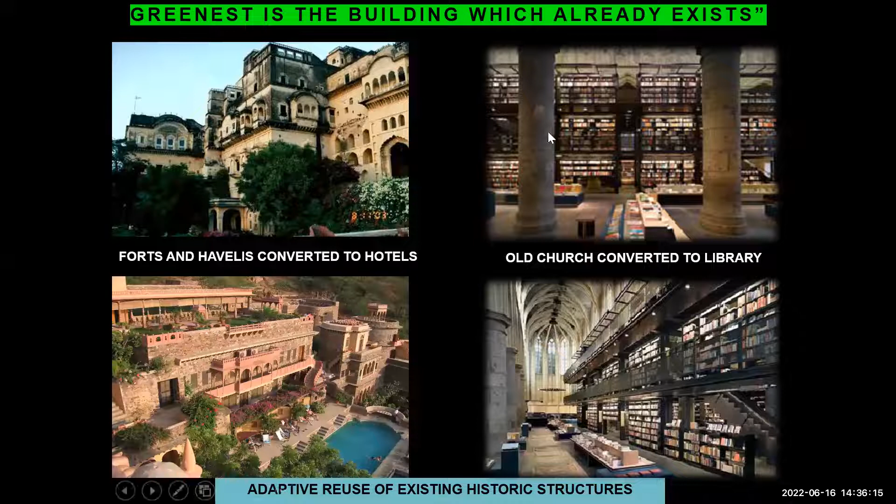We are in times where aesthetics and environment can go so beautifully hand in hand. You don't need the richness of Italian marbles or imported products to make anything look beautiful. If you look at the hierarchy of how you need to select materials, first is material reuse, then using materials with high recycled content, then materials which are recyclable, natural and plentiful, and locally available so you reduce the energy in transporting them. Next is using rapidly renewable materials like bamboo, which grow very fast, and then using very low embodied energy materials. In a house or building that you construct, the embodied energy plays a very significant role in the first year for that house.

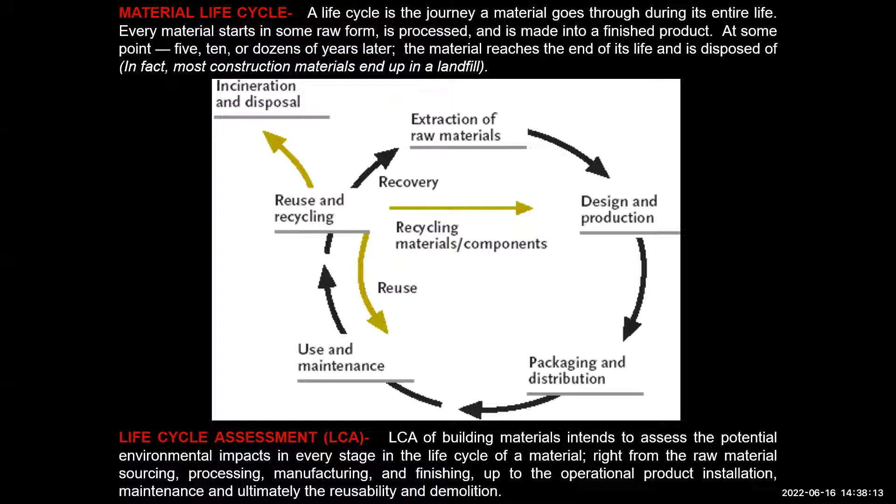When you judge a material, when you talk about embodied energy of any particular material, you need to see the complete life cycle, right from the extraction of that raw material to its design and production, to its packaging, to the use and maintenance, and then reuse and recycling. The energy that material takes in that entire life cycle has to be seen as the embodied energy of that product.

So there are certain products which are very high in their embodied energy, like metals, aluminium, stainless steel, which rate very high in embodied energy. Then there are materials which are medium energy, like lime, clay brick, tiles. And then there are low energy materials like fly ash, sand, aggregate, etc.

So let's say you want to use metal. The best way to use metal is having a high recycled metal content, because that will have less embodied energy, and metals are easily recyclable. The way you use them should also be such that you can reuse it later. So instead of welding them, if you use nut and bolt, bolted sections, which can be reused again, then over the entire life cycle of that product, the embodied energy of that material becomes much lesser. When you use cement or concrete, you can use recycled aggregate in the concrete.

When you use bricks, let's say a rat trap bond would use far lesser material and energy compared to a regular brick. A fly ash brick would have a lesser embodied energy than a regular clay-fired brick. So these things have to be evaluated when you are choosing a product for making a building.

But that's not the only thing that you look at. When you evaluate, and you have to judiciously select a material, you have to look at all of these factors.

Let's say I have a window, and in that I have a window section which I need to use. Now for the frame, I could either use aluminum, UPVC, or another material, let's say wood. But if UPVC, over its entire life cycle, is able to save me the operating energy of that building by reducing the heat which comes in, and for our climate, the cold which comes out, then it may be a better product to use over aluminium, which will let in more heat, and I will eventually be using more energy over the entire life cycle of the building.

So everything has to be evaluated. How do we install that particular material? Can I reuse it again? That also has to be considered. We have to look at the durability. What if I use a material which may have very low embodied energy, but it's not durable, and I have to keep changing it every few years? Then the whole point is lost. So as an architect, as a user, we have to look at the material in the entire paradigm, looking at the complete life cycle of that product.

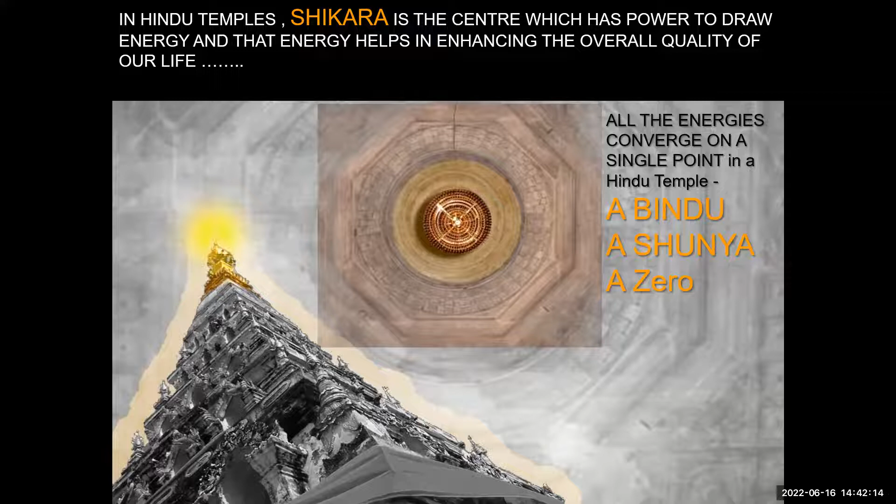The first understanding, as I mentioned, when we look at sustainability, you don't only look at energy, you look at the holistic picture. You see that the building you design will have occupants who will inhabit it. Their well-being is as important as the environment. So we have to balance all of this.

For example, if I'm designing an office, the best way to protect the environment would be that I give hardly any windows, because then the heat will not come in. I will not be burning coal to generate energy for that building, because that'll be the least amount of energy that would require.

But what about the people who are going to inhabit that building? If they don't have natural light, if they don't have connection to nature outside, if they don't have that diffuse daylight coming in, it will affect their well-being and their overall psychology.

So it's important that we give glazing, but in a way that for our particular climate, we balance the window wall ratio. We use a high performance glass, and we shade the glass according to the sun direction so that minimum heat comes in. That minimum heat we then try to remove using the most efficient and effective equipment. So you are balancing - that's the smaller scale I'm talking about.

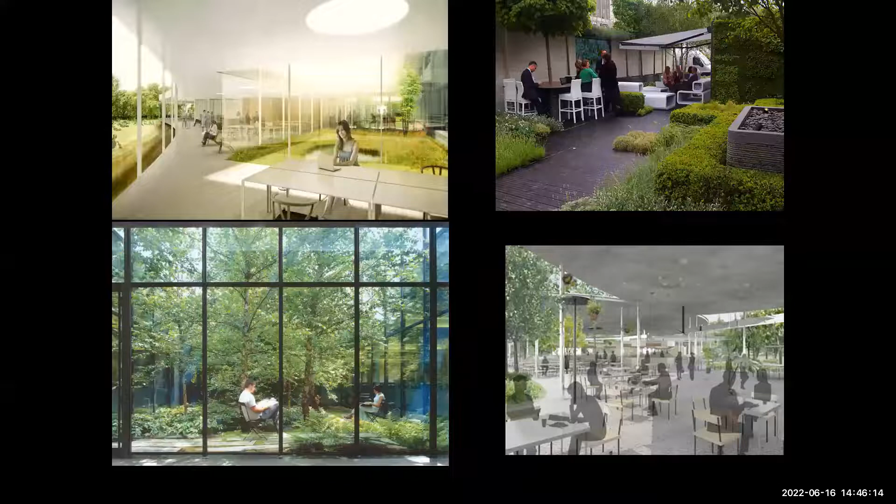And nature is timeless, it's beautiful - there's texture, pattern, colors. So connecting your buildings, having nature in touch with you for your everyday life, is very, very important.

Designing urban environments that respect and engage those natural systems by bringing ecological infrastructure aesthetically creates more beautiful social spaces. That also lowers the temperature, helps recharge water, gives you so much fresh air, and means you rely less on sources of pollution. Reducing the pollution, that's the best way.

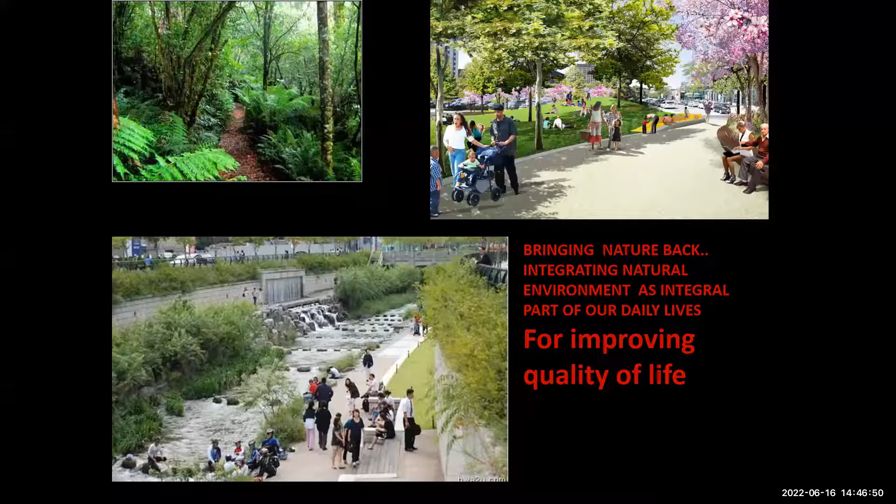This is a very interesting example. If you see in the lower picture, there was an existing nala which they've converted into a beautiful stream, and the ecology and the economics of the place has really become much better.

And interconnected spaces, social spaces - this is a project, Green Boulevard, where instead of one large tall building the developer wanted to build, we made a series of three buildings which shade each other, with the ground floor stilted. We call it a nature's walk, where people walk through these spaces before they go into their offices. There are water bodies along the wind direction which cool the space very nicely, and even in peak June, you'll find people sitting outside. It's changed the way office space is perceived, where you amalgamate your office spaces beautifully with natural areas.

The buildings are very efficiently designed - the footprint is such that it's able to capture natural light from both areas. The buildings on the south and west side have sandwich walls, which are AAC block aerated concrete blocks - much lighter, consuming less concrete, with lower embodied energy, and they also help lower the temperature inside because they provide insulation as well.

The complete glass is nicely shaded. The window wall ratio is only 30%, as against 50-60% that you see all around, which gets in too much heat and light. Now this gets only diffuse light. There's more glazing towards the north. There are these beautiful social spaces which lower the temperature.

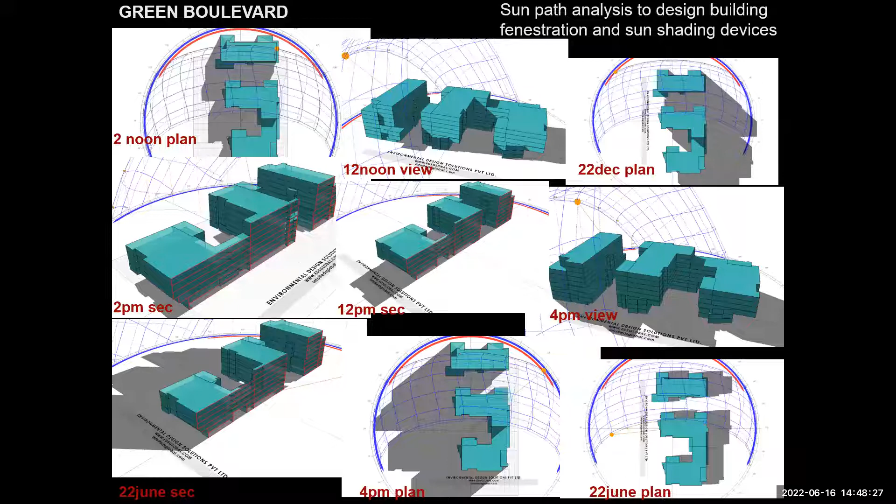These are the building simulation models, from which we could predict day one how much energy this building would actually consume. So instead of 200 square feet per ton, this actually gave us 800 square feet per ton of air conditioning. This was a very high energy performance building, and these are the various factors which contributed to lowering its overall operating energy. It operates at 1/8 of what a regular neighboring building would do.

This is another project, IGBC's first platinum building, called Patni Computers, and it saves about 36% compared to an ASHRAE base case, and almost 50% as to a standard Indian building.

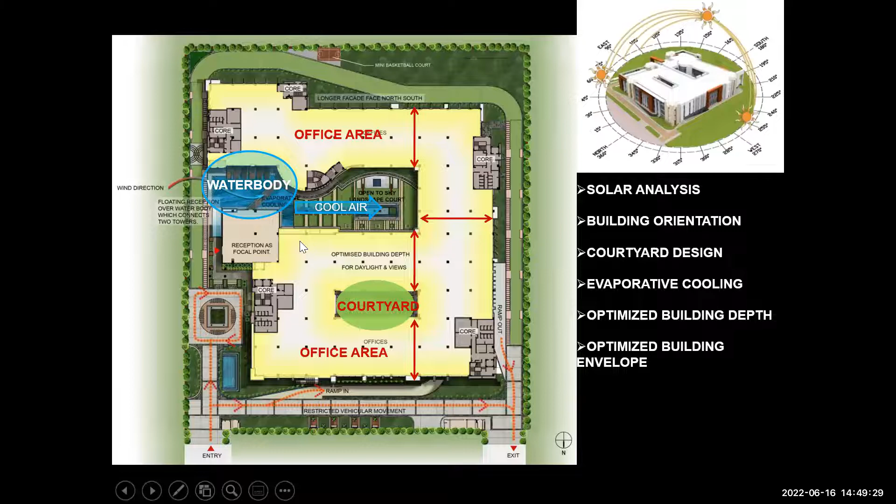It's a very nicely shaded building. There's complete diffuse light which comes in. There are 2 courtyards which actually bring in that light. There are light shelves which get the diffuse light and cut the glare coming in. Then there are water bodies and jalis which get cool air inside into the courtyard through the Venturi effect and cool this space completely - again inspired from our ancient architecture.

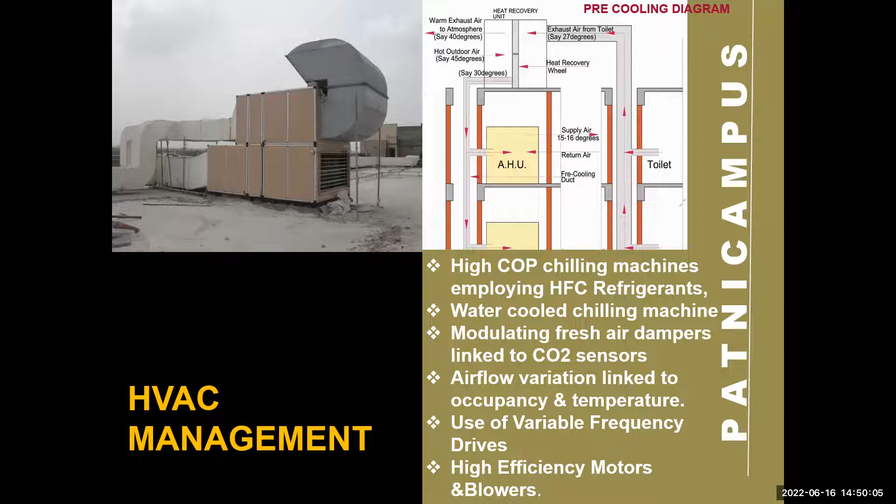These are the simulation models which lower the operating energy of this building significantly. At the same time, the materials used had very high recycled content. The walls were all aerated concrete blocks. In terms of equipment too, these were highly energy efficient - there were fresh air dampers linked to CO2 sensors. We were using pre-cooling and free cooling in fair weather seasons to lower the air conditioning cost as well.

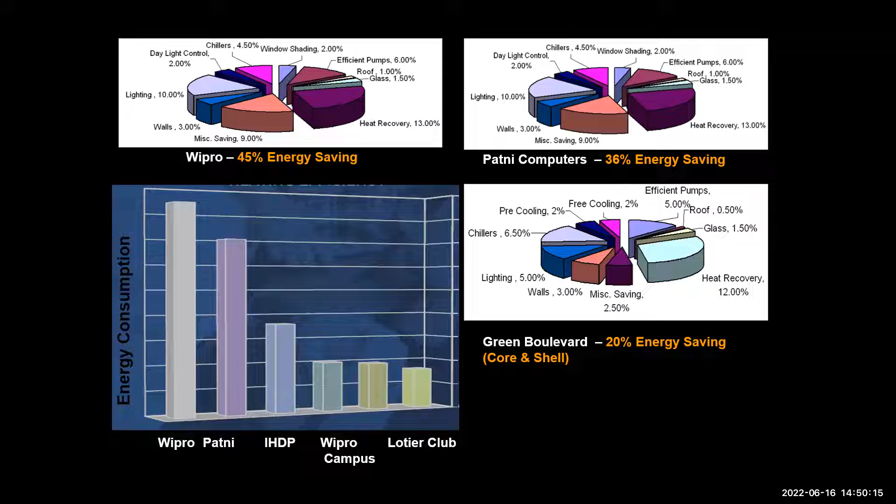So you see all these buildings were very high energy performance, but we wanted to do better. This is another project where the client wanted to break the building and build a new one, and we said no, you retain it. This was how it used to look - a lot of glass but not much natural light inside. So they had a beautiful garden, but it was not put to much use, because these were all fixed glasses. No one could actually go out and enjoy this place.

So this is an atrium which had a lot of glare. We revamped the office - we said let's not break the office at all, reuse it. We use the core and shell of the building, we only redo the interiors. We changed the facade to make it more energy efficient.

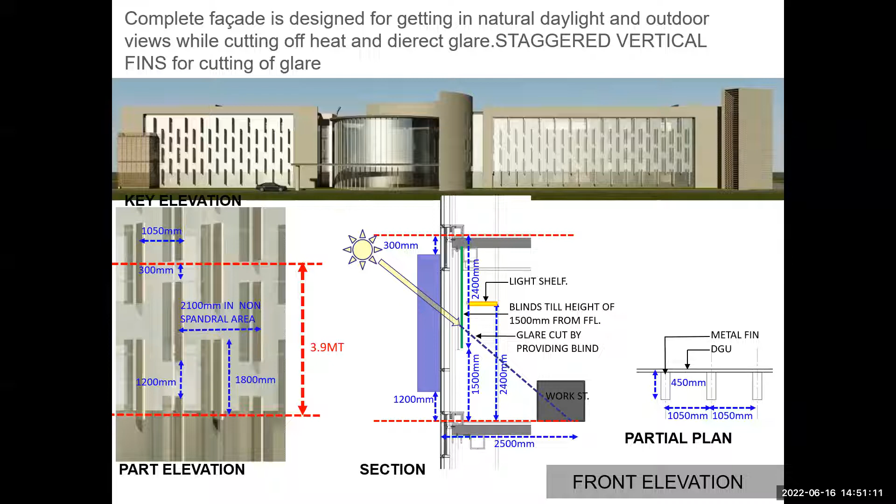So that's what we did, facade studies to ensure there was no glare coming in. That's how the facade is now, with these fins which modulate to give it interest, and at the same time shade the sun coming in. So that's how the outdoor area is now much more used, because now we have doors which open up into these spaces. We have the cafeteria, which we moved from the second floor down to the ground floor, so people could enjoy this outdoor area more, and the load on the cafeteria would be much lesser.

There are a lot of people who work out of this outside area too, because this is the north side, it's nicely shaded, and that allows people to work outside, saving more on operating energy. This is the west facade, which is nicely shaded. This is the atrium now, which has a double insulated roof glass with a shading system. We introduced plants inside so people can enjoy that - there's more fresh air within, and more oxygen inside these spaces.

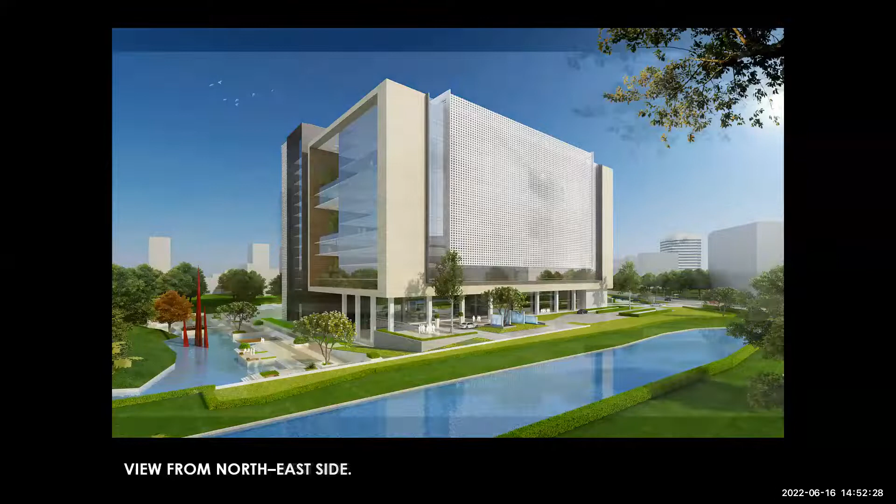Then this is another campus where we studied how shading and wind direction would help cool the place. There was an irrigation canal where we filter the water and use it for recreation purposes, so when the wind blows over it into these spaces which have these cuts, the wind direction moves from here towards the other side, and it actually cools the space. This is the jali screen which shades the interior. Overall, it really helps to effectively reduce the operating energy of the building.

So these are all high performance buildings which got platinum rating. But then we wanted to do better - we said let's attempt to go the net zero way. A net zero building will be a building which generates as much energy as it consumes over the entire year.

So this was a project, Shunya, which was way back in 2008, that we made out of waste containers. We took 4 old waste containers, designed them around a courtyard, which works very well in our Delhi climate. We made verandas out of the center two containers. The first container was mainly the entrance, kitchen, and toilet, which were non-air conditioned. The other containers were air conditioned. This is about 1,000 square feet of built area, and we had just 1 ton of air conditioning that we used.

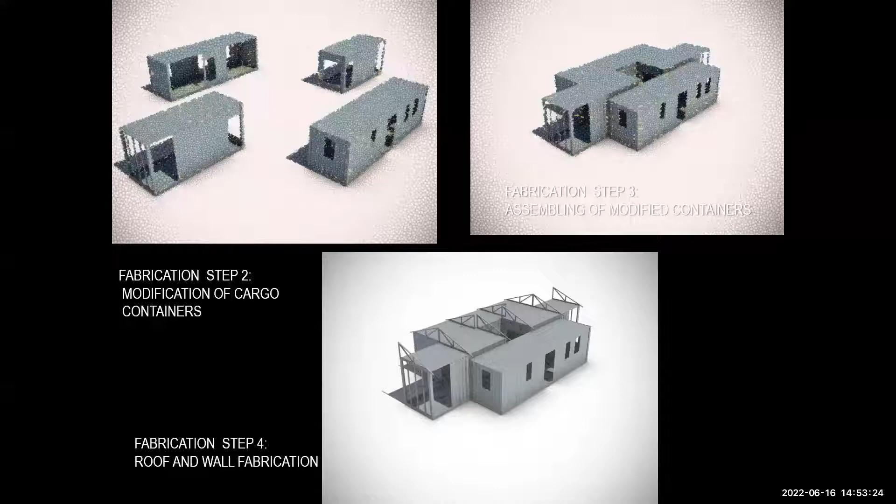I'll go through how we brought down the carbon footprint of this building. We took this building and saw what the electrical load was, which was 8,500 kilowatt hour. Cooling load was 2 tons, and carbon emissions were 7.6.

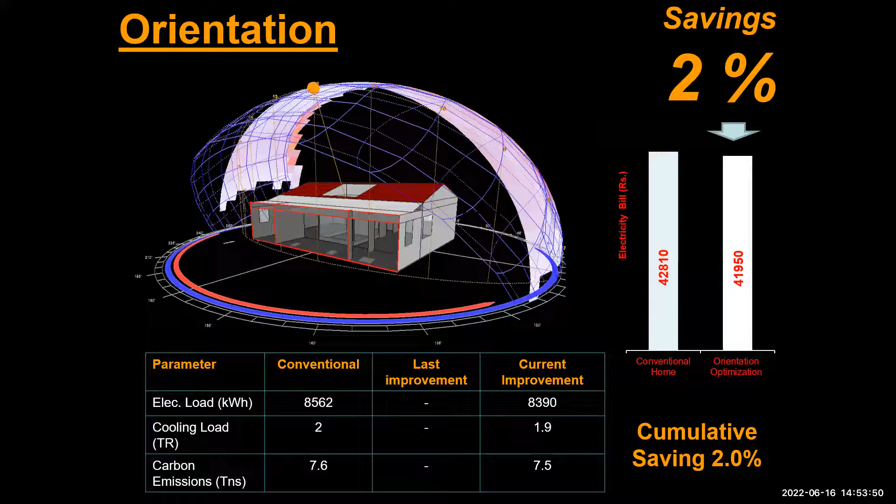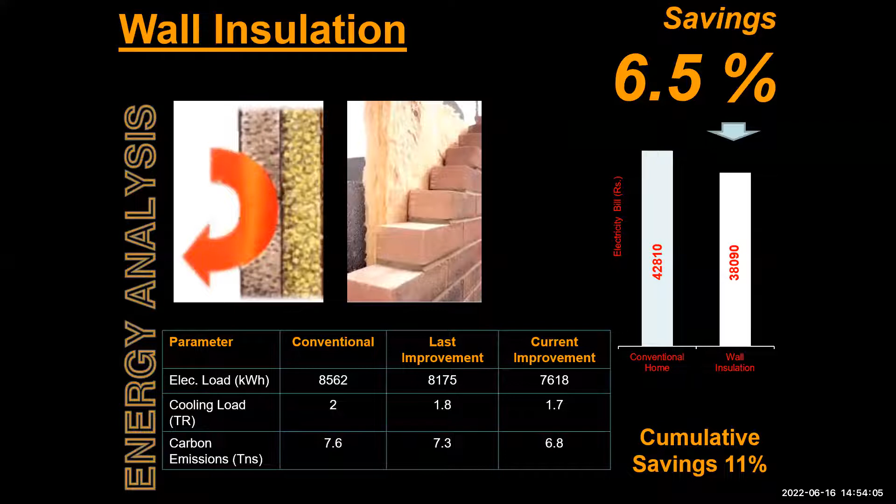We first corrected the orientation, so it was just a model first we started with. We corrected the orientation and realized we saved about 2% energy. We insulated the roof and saved another 2.5% energy. Then we insulated the walls and saved a cumulative of 11% energy, 6.5% just through the insulation of the walls. The carbon emissions also dropped down, which is the last line that you see.

We introduced double glazing, which saved another 4% energy. Then we changed the window wall ratio, reducing it, and saved another 4.5% energy.

Complete daylighting was achieved through the courtyard, with natural and diffuse light coming through it. We introduced daylight sensors, occupancy sensors, and shading devices, saving another 5.5%, cumulative of 31%. Then there was improvement in the carbon emissions, which also dropped down.

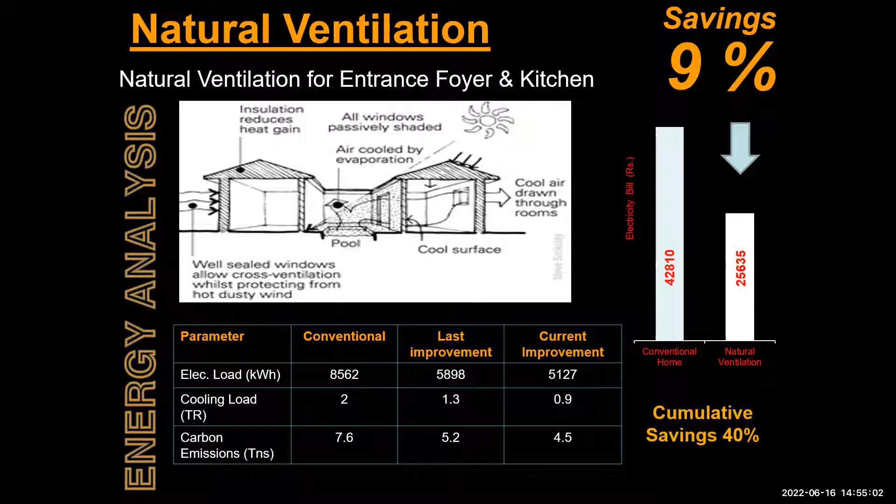Then we introduced some plantation in the courtyard and louvers in the courtyard, saving some more energy. We did natural ventilation for the entrance area, the kitchen and toilet container, which saved another 9% energy. We used solar AC, which saved another 20% energy. We used 5-star rated equipment, saving another set of energy.

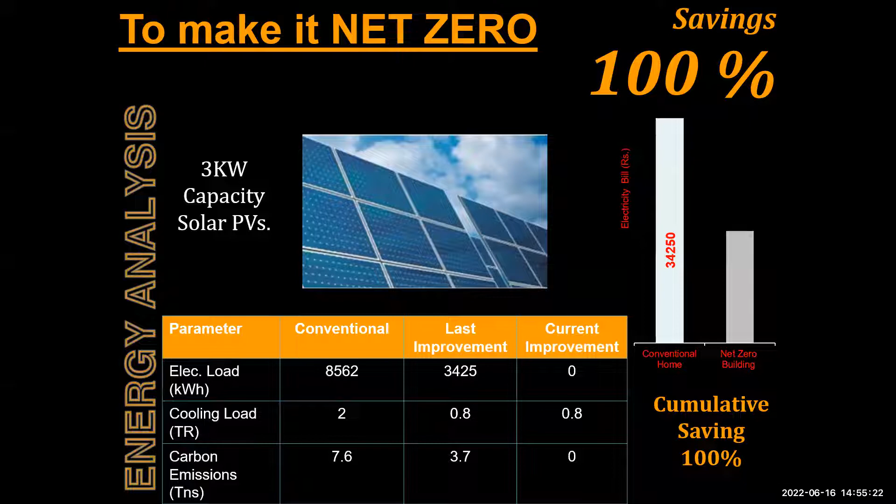Energy consumption wasn't the only focus; it was about zero water, zero waste, and zero energy. So we had a vegetable garden where you could grow your own food. We had a composting pit where all the organic waste went, and the same manure was used within the premises for these gardens. So it was again a closed loop, zero recycling concept.

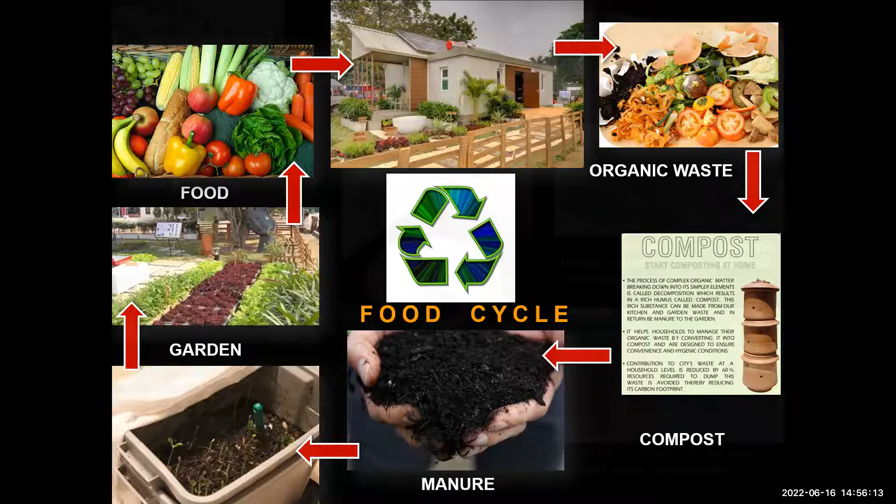Water also had a complete reuse system. We had a roof garden and vertical gardens to reduce the heat and cool the winds coming in, which also gave rise to more birds, flora, and fauna.

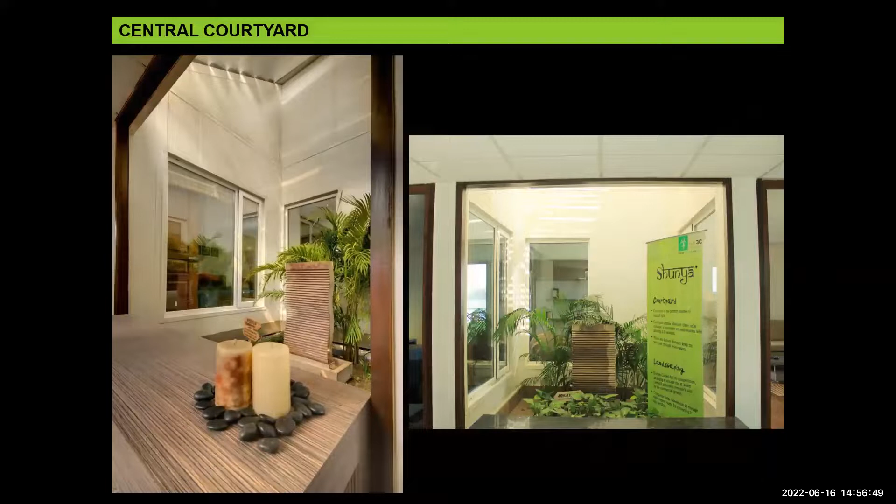So that's how the house actually looks. This was an experiment we did. Every piece of furniture you see is old furniture put to adaptive use here. And that's the courtyard, with all bamboo flooring there.

So we took this experiment and ran this house for 1 more year after it was built, and it was done very successfully.

Then we took it to another office we're doing in Calcutta, and again studied the sun and wind directions. This is an office where the complete facade generates as much energy as it would consume during the year. It's got nice marshy lands, and there's a concept of borrowed landscape where the ground floor has a cafe and outdoor spaces with solar umbrellas. These are on the south side, shading people sitting there while they get a beautiful view of the marshland, even though the site itself is very small. So that's what we call a borrowed landscape.

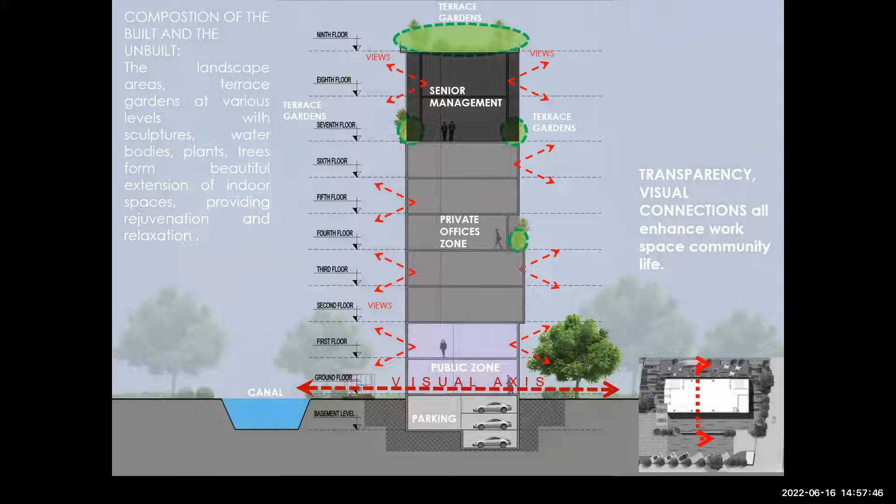We have a roof terrace garden which also has solar panels for shade. The outdoor spaces will also have these solar panels which would light up the entire thing. So these were the analyses we did. First, the intent was to bring down the energy consumption of this project to the bare minimum that we could achieve.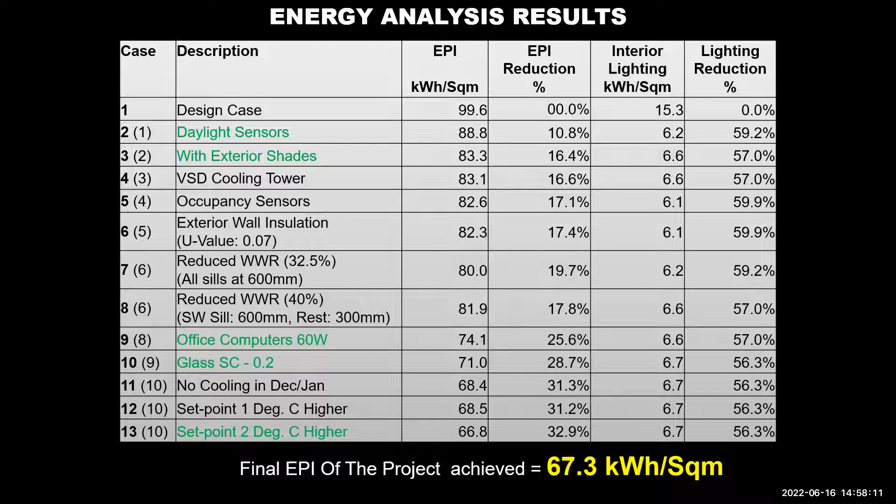So this is the final EPI of the project, which was 67.3 kilowatt hour per square meter, which is actually generated through the BIPV and rooftop solar.

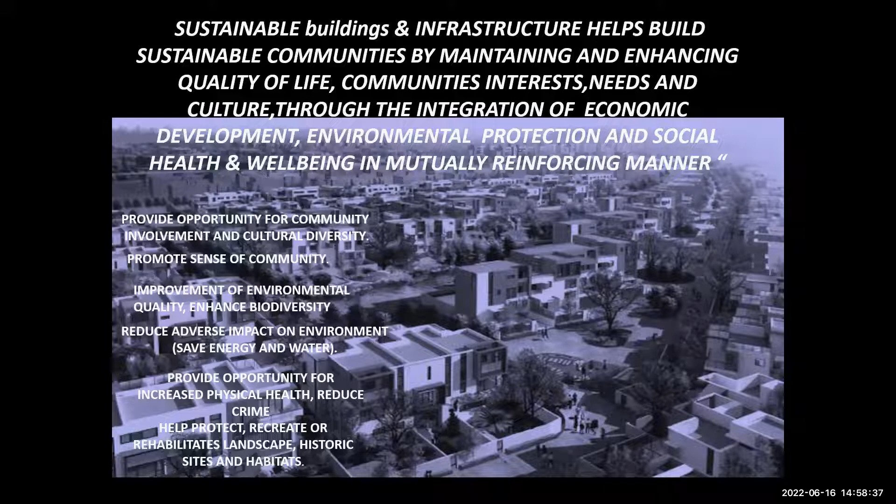In the end, I would like to say that, of course, we can only progress if we go the carbon neutral way. Our Honorable Prime Minister has declared that we are looking at 2070 as carbon neutral, and by 2030 we have to significantly, almost 50%, reduce all those emissions. So we envision India as a zero energy, zero water, zero waste society, and a minimal carbon footprint and earth-friendly society, which will lead from front.

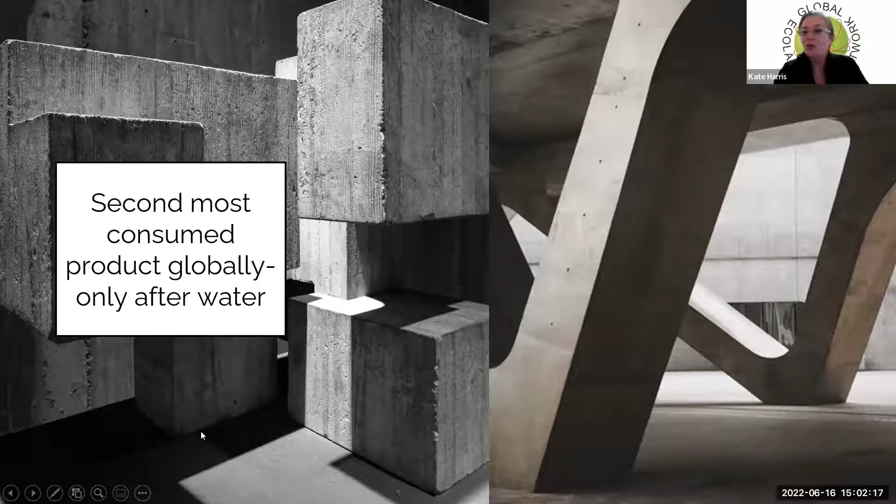Firstly, I'll talk more around the role of eco-labels and the association and driving change with low carbon products and materials. So we saw in some of those pictures, there's lots of cement and concrete, and the challenge is, how do we actually know what good looks like? We also know there's a lot of cement and concrete, and it's the second most consumed product after water, which I still find incredibly staggering.

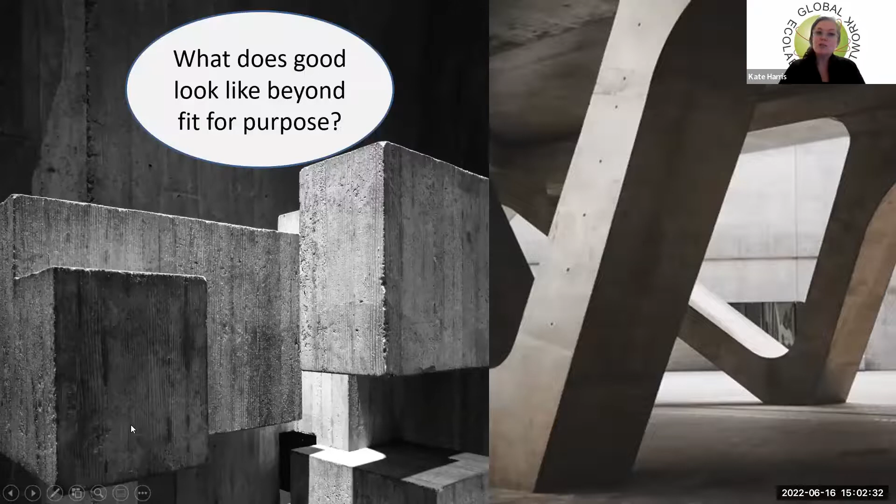So beyond fit for purpose, which all eco-labelled products require, and I'll go into that more, it certainly does require some environmental consideration as well. And Bjorn Erik, our chair, spoke very much to that, the importance of actually looking beyond the surface level to understand what good might look like.

Some of the tools that can be used to work out what good looks like are methods such as life cycle analysis, environmental product declarations, and of course we also see environmental management systems used in terms of organisational environmental efficiencies. The challenge is, how do we actually ascertain what good looks like, particularly for those who may not be environmental scientists or able to read such data as environmental product declarations? And that indeed is where the challenge and the opportunity of eco-labels come in.

So eco-labels really are a very easy, clear way of demonstrating an efficient and effective, good, environmentally preferable product. It should be very easy to see a label and know that that is a better choice for people and planet for a product or service. And that is the role of eco-labelling.

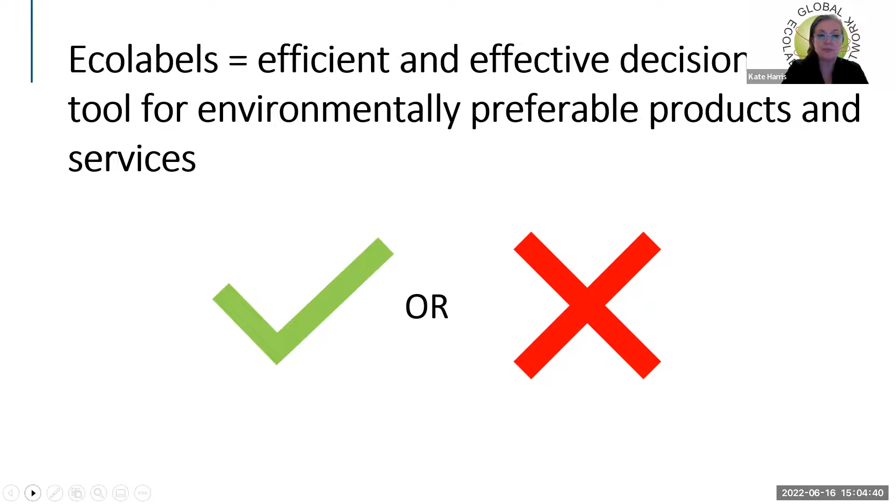There are a lot of discussions around eco-labels, and I think if you go on to things like Ecolabel Index, you'll see that there are hundreds and hundreds, but indeed many eco-labels that use that term are not purely an eco-label. And so when we talk about eco-labels, it is in the true sense of the word of ISO 14024 and the international standard definition.

So just to touch on a high level, what does that actually mean, and the credibility and rigor that sits under ISO 14024, because it is important to understand what this stands for and the credibility and transparency that goes with a true eco-label.

So it should be voluntary. It should be on that upper echelon and not minimum compliance. It is full life cycle based, and we'll talk more about that later. So it isn't just one aspect, or cradle to gate or cradle to grave. It needs to look at the full extraction of the product in the manufacturing, the usage, and of course the end of life considerations as well.

If something is eco-labeled and certified against a particular product, that should be transparent. The standards should be easily obtained, in order to understand the actual achievements and boundaries that the eco-labeled product or service has achieved. And very importantly, third-party verification.

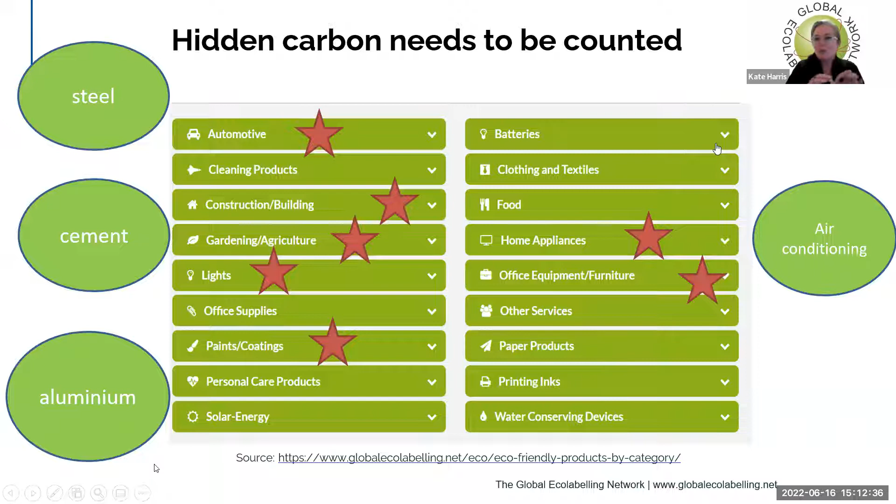So when we look at that full life cycle approach, some might be end of in the usage phase, such as home appliances and office equipment, but others are very much in manufacturing. Many would say paint doesn't have any impact on carbon, but in fact titanium dioxide, one of the ingredients in its manufacturing, has a significant impact on carbon. So again, eco-labels do restrict the amount of titanium dioxide because of the carbon impact. So I'm urging everyone to look beyond the surface of a product.

So how do eco-labels benefit providers, and why do manufacturers get involved? Procurement solutions are really looking for a market advantage. They're looking to reward leaders. How can they know what good looks like? How can they ensure that they're specified into builds and construction so that they know that they're delivering on low carbon solutions? This is really critical.

And of course, sustainable development goals. We know that at a building level this is important, but more and more organisations are also reporting on their sustainable development goals, calculating full carbon impacts and beyond. And we know that eco-labels very much at a core speak to responsible consumption, SDG Goal 12, but touch on almost every single SDG in the suite.

So when we look at things like cement and concrete and steel, they do speak to even clean water, how the water management is managed. So life below water, climate action. We heard Bjorn Erik speak of biodiversity and the importance of life on land and how that is sourced. So really there's a significant touch on many of those, and organisations can use the demonstration of use of eco-labels to also demonstrate their achievements in the Sustainable Development Goals.

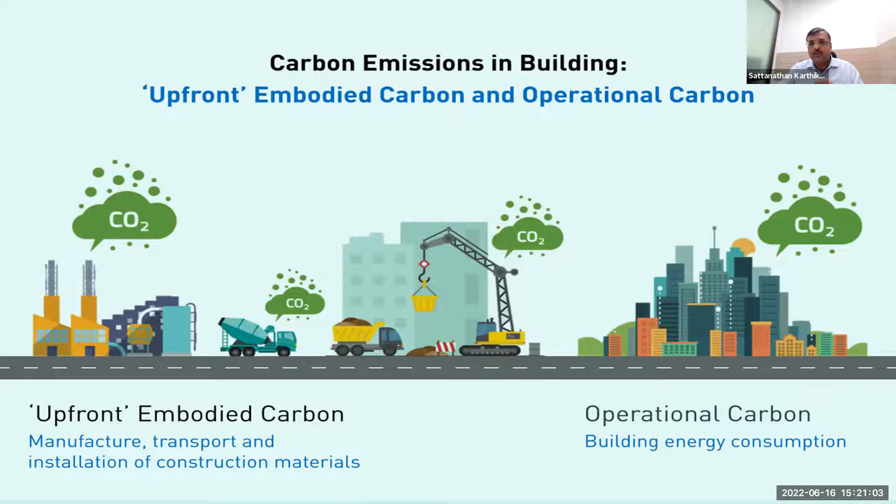But though it looks very small from the building point of view, if you look at it from the country's or nation's point of view, the supply chain of these buildings contributes significantly to the overall country's emissions — whether it is cement, concrete, or steel, they contribute significantly to the overall emission. That is the reason we give a lot more importance to addressing carbon emissions as part of the supply chain as well. So looking at this scenario, we can start working on how to go about the low carbon building.

What is this low carbon building all about? Obviously, the building should have a lower carbon footprint, whether it is embodied carbon or operational carbon — both put together, the building should have the carbon footprint as low as possible. So what are the things it has to do?

Number one, in terms of natural resource consumption, the building should have very low natural resource consumption and should make use of low carbon products and materials as much as possible for construction. The second aspect, for reducing the operational carbon footprint, it has to have the best energy efficiency so that energy consumption is very low, and on account of that, the footprint is also low. Second, it has to make use of renewable energy as much as possible so that the carbon footprint can be brought down further, and this can even allow a building to aspire to achieve a net zero carbon building.

If the building is able to offset the entire carbon emission on account of its construction as well as the operation and maintenance, that is also possible. We are working on the framework and then we will take it forward.

So the point is, as far as this presentation is concerned, I am going to focus more on the products and materials which are contributing to the embodied carbon of the building during construction. What are the things we can look at in terms of reducing the carbon footprint? But incidentally, friends, when you start using these low carbon products, it not only addresses the embodied carbon, it also addresses indirectly the operational carbon.

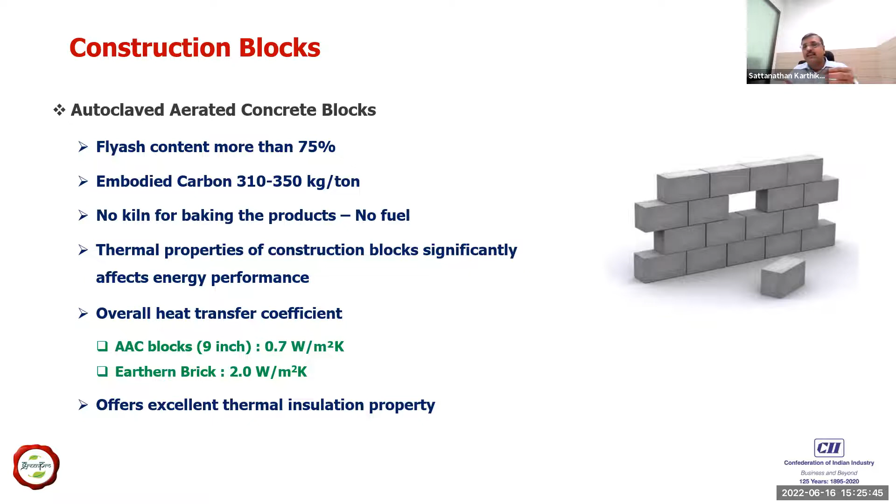There was one question from the audience, how to reduce the heat gain in the building. This is one way of doing it. If you make the envelope more thermally insulated or more efficient, obviously you will be able to bring down the heat gain into the building. So it has got an excellent thermal insulation property.

I will show you some results, how things are working. We have done the simulation of a building made with a brick wall, a red brick, and also a similar building made with the AAC block. When you do the simulation for the whole year, a building made with AAC block has an energy consumption about 4 to 5% lower compared to a building made with a red brick.

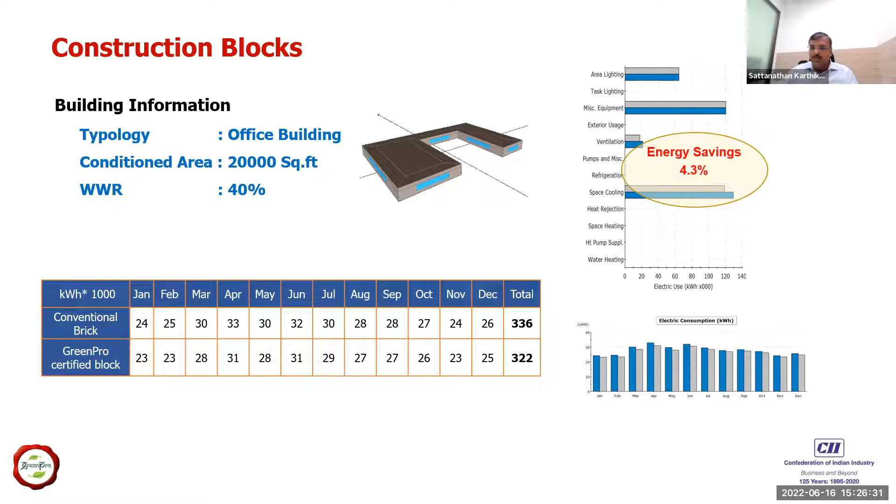The 4 to 5% may look like a very small number, friends, but this is for the lifetime of the building, you are able to bring down the energy consumption by about 4.3%. We did this only for a small building. When you go for a multi-story building, in case of a commercial building, the energy consumption reduction will be much more significant, and you will also be able to optimize the cooling load and the air conditioning capacity. Because of the reduction in cooling load, you are gaining two aspects: one, because I am going for an AAC block, I am able to reduce the embodied carbon.

Second, because I am able to reduce the cooling load, I am also able to reduce the energy consumption, and hence the reduction in the operating carbon footprint as well. So the lower emissions we are able to achieve in both the aspects.

I want to take some more examples here. Cement is a common material we use in building. Without cement, you cannot build a building. Generally people tend to go for ordinary Portland cement. There are different types of cements available, and these contribute a significant amount of carbon footprint. Cement making itself is an energy intensive process, and it leads to more carbon emissions.

There are different types of cements. One is ordinary Portland cement, which is supposed to be a very pure cement, and second is Portland Pozzolana cement, PPC, which has fly ash to the extent of about 35%. When I say fly ash to that extent, the clinker requirement comes down, and so the carbon footprint also comes down.

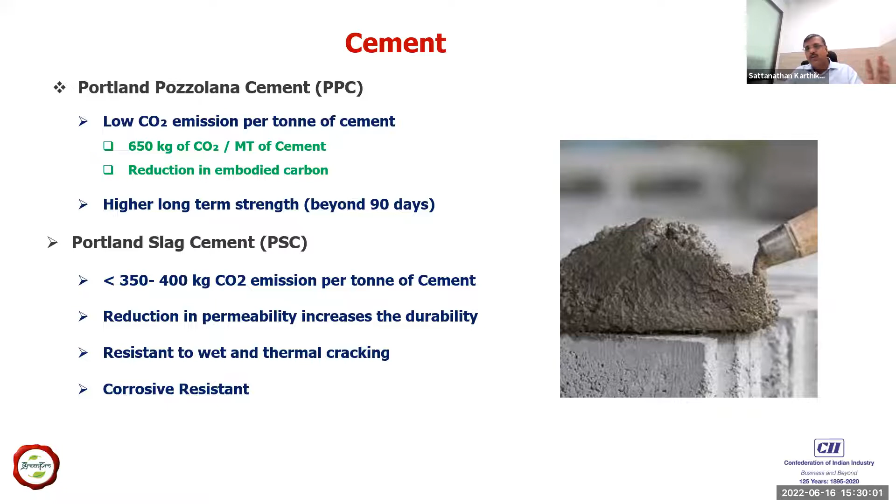If you look at the advantage compared to OPC, there is an increase in durability, and it also addresses corrosion related issues. Even in terms of thermal cracking, it is a much better cement compared to ordinary Portland cement. So apart from the reduction in carbon footprint from blended cement, there are many more benefits in terms of increased strength, durability, and corrosion resistance.

There is another cement available, composite cement, which is gaining a lot of importance nowadays, where both fly ash and GGBS are used for making the cement. The carbon footprint of this cement is even lower. The workability is much better compared to other cements, with lower heat of hydration and shrinkage, and very good corrosion resistant properties. Obviously, it reduces the embodied carbon of the whole building.

Friends, it's not only about reducing the embodied carbon. When you go for these blended cements, you will also be able to reduce the cost of construction. Compared to ordinary Portland cement, these cement products have a lower price because of increased additives. You can have a cost comparison at the market as well.

There is an exclusive presentation in the next session on ready-mix concrete. I don't want to go deeper into this, but I will highlight how the carbon footprint can be addressed as part of this. A variety of concrete mixtures are available, and you can work on addressing the carbon footprint in the concrete mixture. There is lightweight concrete, pervious concrete, high performance concrete, waterproof concrete, or self-compacting concrete - different varieties of concrete materials available. So the question is, are we using the right type of concrete for the right applications?

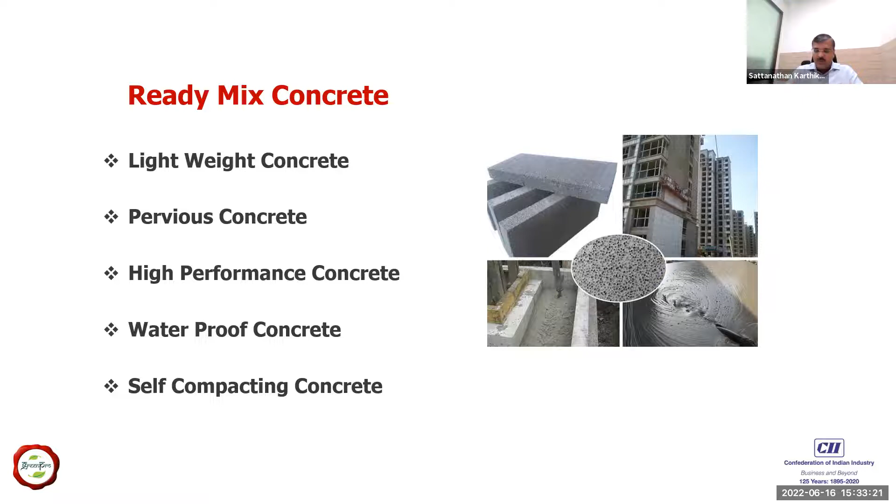Another aspect is lightweight concrete. It not only reduces the carbon footprint of the building, it also improves the thermal insulation property. This lightweight concrete has a very low density, anywhere between 800 kg per meter cube to 1200 kg per meter cube. At this density, the thermal conductivity or U value is much better compared to conventional concrete. When the thermal insulation property is better, the heat gain in the building comes down, which also reduces the air conditioning load and hence the energy consumption in the building.

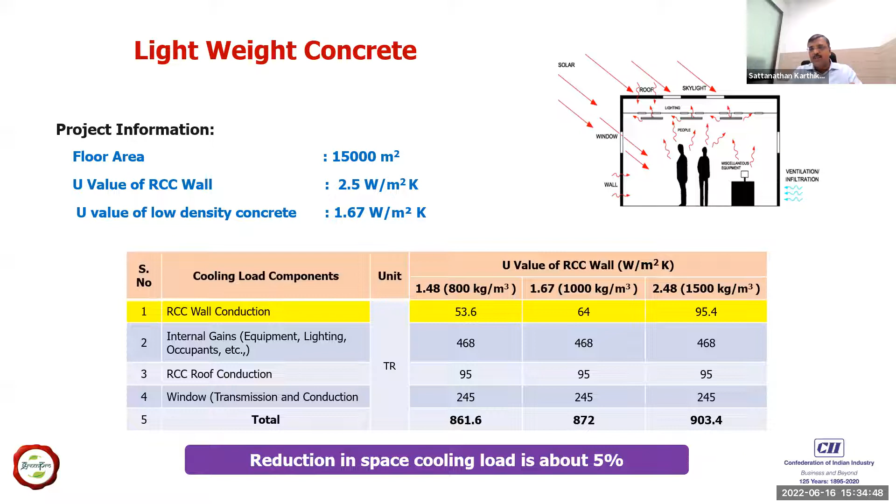This is a case study comparing a conventional RCC wall with a lightweight concrete wall. A conventional RCC wall has a U value close to about 2.5 watts per meter square Kelvin, whereas a low density concrete wall has a U value of about 1.6 watts per meter square Kelvin. If you do the calculations, you'll be able to clearly reduce the heat gain by at least 4 to 5%. Since this is part of the construction itself, this saving goes on for the lifetime of the building.

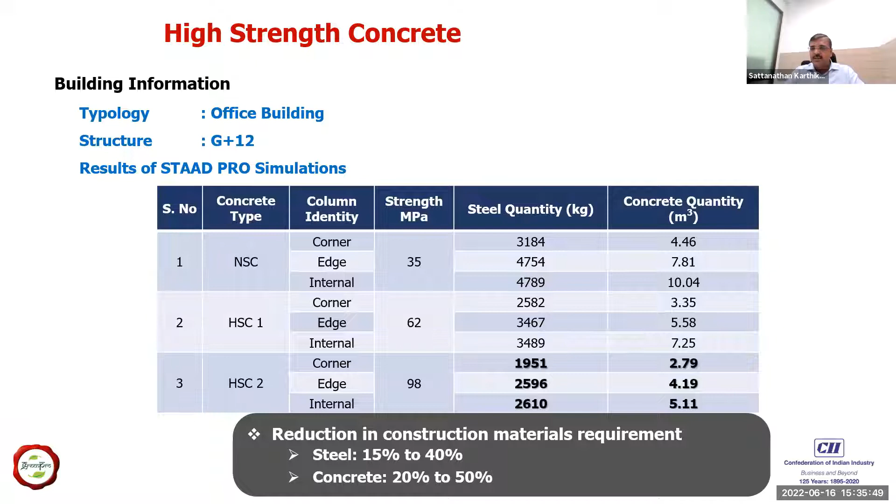Another aspect is high strength concrete materials, which you need to use depending upon the requirement. The advantage is, if you go for higher strength, you'll be able to bring down the quantity of concrete and also the steel consumption as part of the concrete. I'm not saying you can use high strength concrete everywhere - you need to use it judiciously, depending upon the requirement. If you incorporate high strength concrete by design, you have the opportunity to bring down both the steel consumption and the concrete consumption significantly.

Another major product category we need to look at is steel as part of construction. Steel is a very energy intensive industry, and the carbon footprint of steel material is also significantly high. But a lot of efforts have been taken up to bring down this carbon footprint of steel now.

There is an eco-labeling - we have GreenPro eco-labeling for steel as well. It looks at various properties of the steel. Typically we look at only the strength, but we also look at how ductility has been maintained. This is a very important parameter in steel utilization, because from the durability point of view, more than strength, ductility matters a lot. The ductility, which is tensile strength to yield strength ratio, should be more than about 1.15. We also look at corrosion resistance property, because this is one thing which reduces the life of the building.

So the corrosion resistance also has been looked at. And in this process, we are also looking at how the resource efficiency has been improved in the manufacturing process, so that a lower carbon footprint has been achieved from the steel making point of view. So these steels are identified and then eco-labeled. So friends, these are some of the materials I just thought of highlighting.

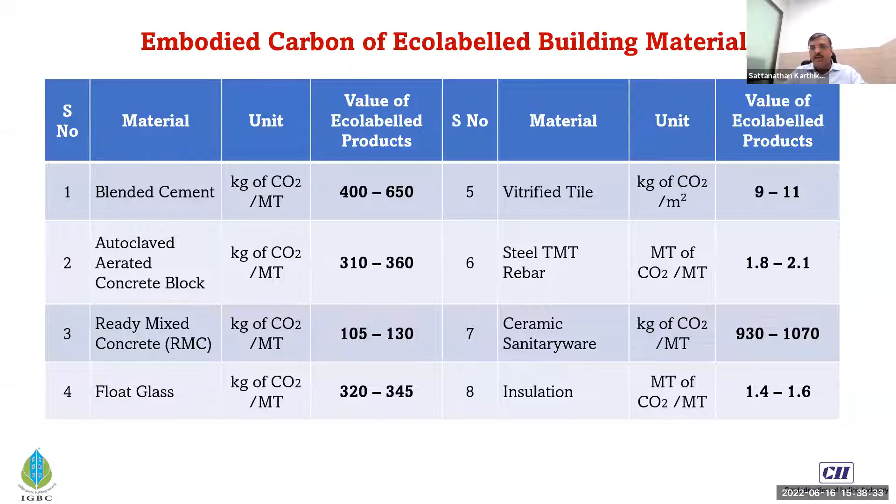Our submission to you all is please make use of the actual carbon footprint of our Indian product manufacturers. For example, if you take cement, typically they use close to about 850 to 900 kg per ton of cement, which is no longer valid. Indian cement plants are much better - the carbon emission of Indian cement is much lower, even compared to European and American cement manufacturers. So my request to you all is, look at the Indian manufacturers' carbon footprint and use it for estimating the carbon footprint of the building. These are some of the points I thought of sharing with you.

How can you identify these products? These products can be identified through the GreenPro eco-labeling. This is an initiative launched by CII. We evaluate the products based on a holistic life cycle framework, which addresses all aspects of the life cycle, and it has been internationally recognized - the Global Ecolabelling Network has recognized this GreenPro eco-label. This label helps in achieving sustainability goals as well.

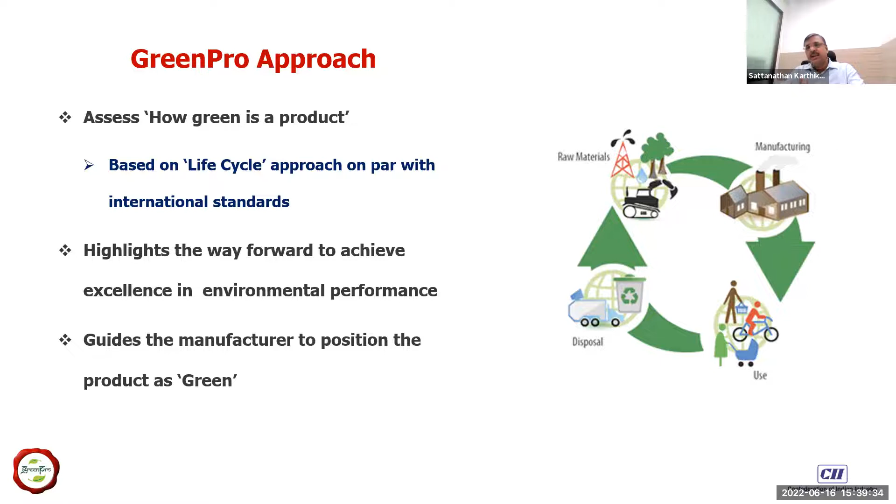So what is the approach? We assess the product holistically based on the life cycle approach. This means we not only look at product performance, we look at the raw material, the manufacturing process, the performance of the product during use, and also the end of life management. It is then evaluated and tested by a third party, and the GreenPro certification is issued for this product. So these products have a lower carbon footprint. My request to you all is to make use of GreenPro certified products for your construction.

What are the benefits from the manufacturer's point of view? There are many - it is easier to convince, there are export opportunities because this label is recognized in other countries as well, there is lower resource consumption and hence lower carbon footprint, it easily differentiates products from the competition, and there is increased market reach as well for GreenPro Ecolabel products. You may be surprised to know, especially from the manufacturer's point of view, there are about 11

As of today, we have more than 5,100 products certified by GreenPro, available in the market from more than 170 companies. In any product category from the construction industry point of view, if you look at all the leading players, all major leading players are there, and they have got their products certified.

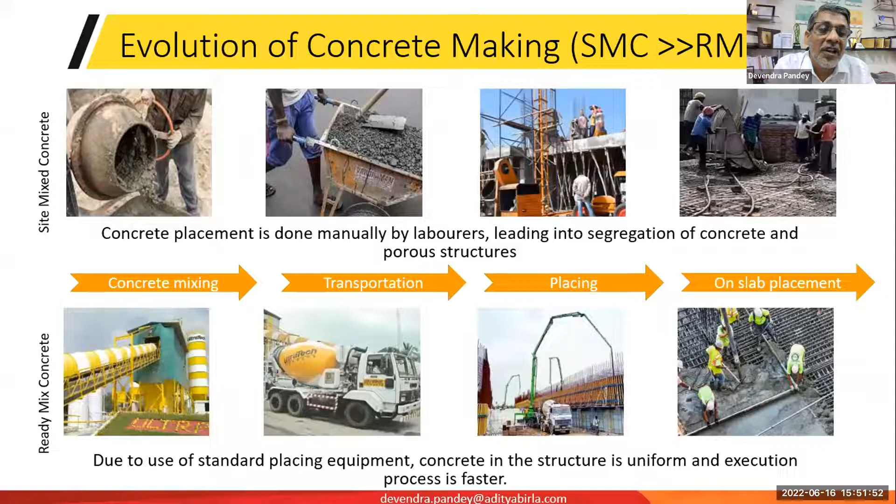But before I get to some of the emerging technologies in concrete itself, let's talk about ready-mix concrete, which in our country we have been very slow to adopt. We have been late adopters as a country as a whole. We have been making our concrete at site a lot. This slide basically represents the process of site-made concrete on top, and the same parts of the process when you use ready-mix concrete, we use better technology, better equipment, more predictable systems, cleaner environment, so all of it. So even before we start trying to adopt more modern technologies, we need to, as a country—I'm talking about industry as a whole—be conscious about making ready-mix concrete our choice rather than making concrete at site itself.

There are a lot of benefits of doing that, right from reduction in labor, improvement in quality, improvement in speed, convenient process of purchase, reduction in wastage, reduction in pollution, more sustainability, and a lot of performance-related varieties are possible. Gone are the days when we had this excuse that we don't have a ready-mix concrete plant around us. Today's spread of ready-mix concrete in the country goes up to tier 2 cities, and in some cases even much smaller cities as well.

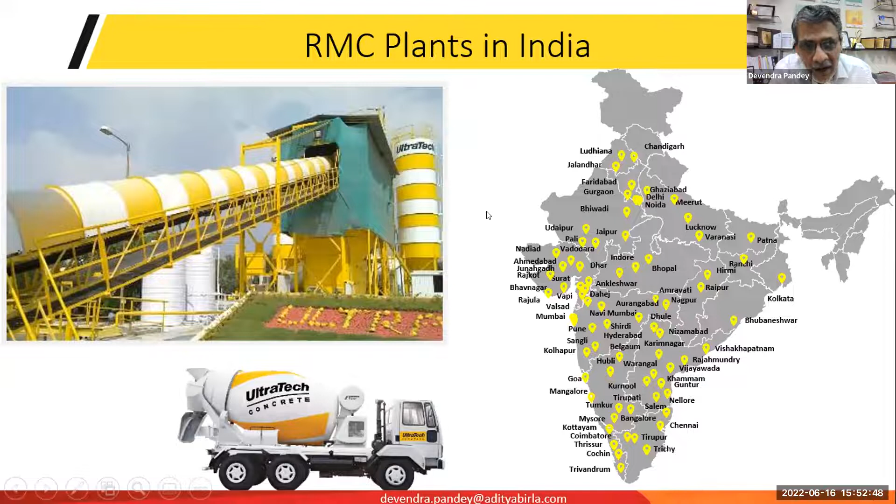So this is a broad level spread of ready-mix concrete through the country. We have sufficient availability, and it's growing, and I'm glad to say that adoption is happening fast.

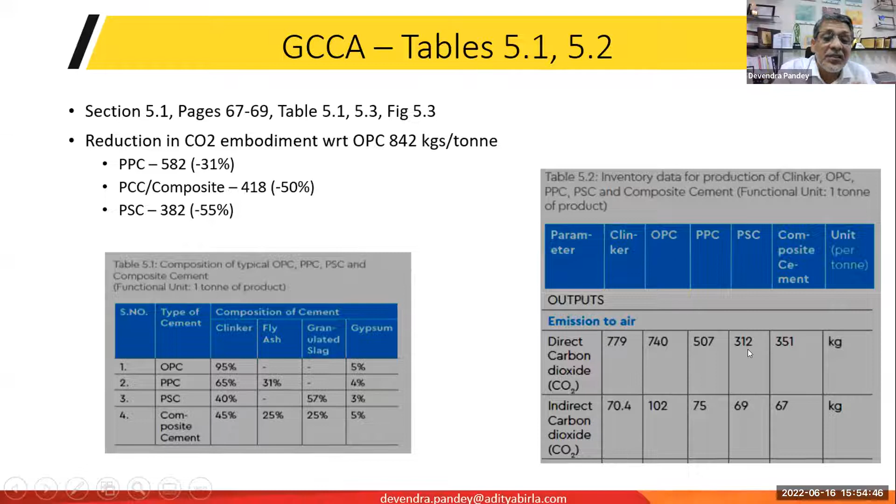This first slide was covered a little while back by Mr. Venkatagiri also. This is from the latest publication which GCCA has done, and it captures the composition of OPC, ordinary Portland cement. PPC is Portland Pozzolana cement, which has about 31% fly ash in it. Portland slag cement has about 57% GGBS in it. Composite cement has around 50% of fly ash and GGBS combined in it. Regarding the carbon footprint: OPC is at about 740 kgs per metric ton, while PPC is at 507, slag cement is at 312, and composite cement is at 351. This is when you directly use the cement, making the choice of cement.

But when you are designing a concrete mix, you have a little bit more liberty—or your ready-mix supplier has a lot more liberty—in tweaking the mix and targeting a certain percentage reduction in the carbon footprint of the concrete itself. So I'm just showing you here 3 categories of concrete products which have 30%, 40%, and 50% reduction in CO2.

How is this done? So here we go. I'm showing to you here 4 mixes.

Mix one is basically if we made an M30 grade concrete using just OPC. It would consume about 410 kgs of OPC, and the CO2 footprint per cubic meter of concrete, only for material production. We can, of course, extend this analysis right from production up to construction and even in the life cycle, but at the moment I'm covering the material. So concrete itself is 413 kg per meter cube of concrete.

While in mix 2, what you see is an incorporation of fly ash within the allowable limits of the Indian standards. So the embodied CO2 reduces to 282, which is a 32% reduction.

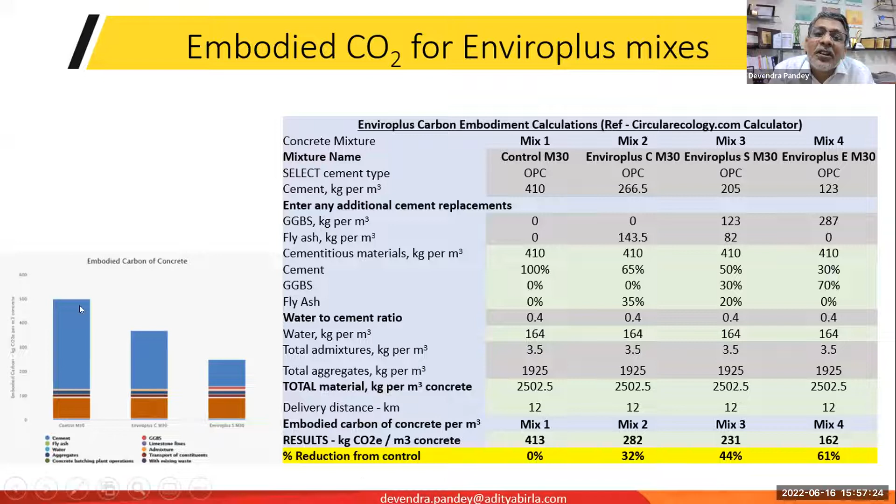So the point is that the information available to us today allows us to certify a concrete mix based on its carbon footprint. And the specifiers, I think the time is coming when specifiers can start specifying, not just based on grade of concrete, but also based on CO2 footprint. And I think concrete suppliers would be able to support this kind of specification.

Now there are mandates across most of the municipal corporations that this waste needs to be recycled in plants. Government is supporting that initiative, and in a lot of locations you now have these plants which are recycling this material in a very proper, scientifically designed setup.

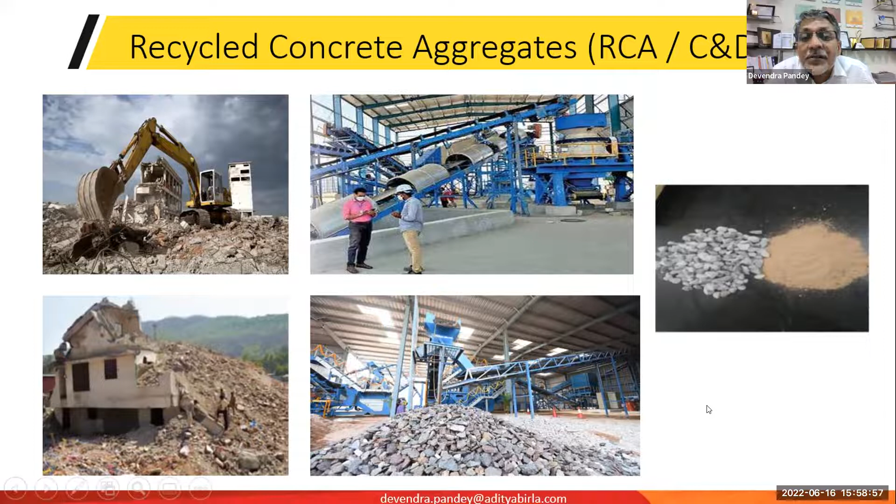Now, another approach towards improving the sustainability or reducing the footprint is basically making our materials last longer. So building durable structures is an important approach.

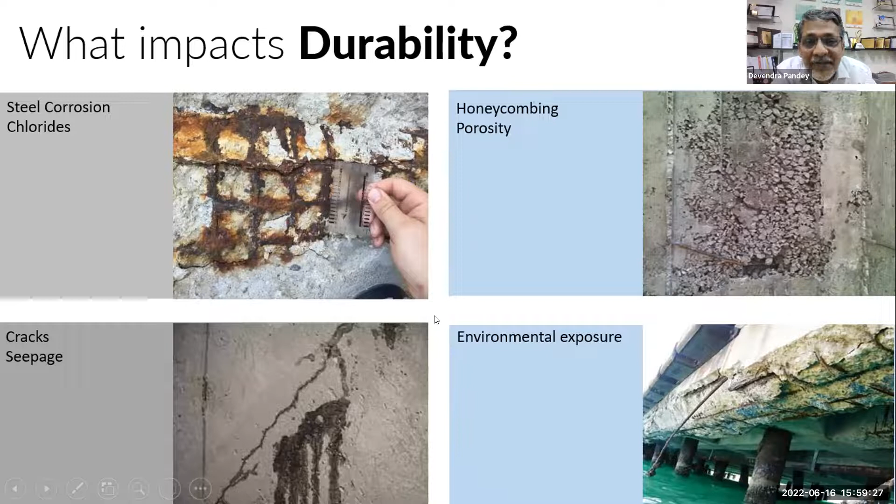Without getting into too much of the technicalities of this subject, the various kinds of problems which lead to the lower life of concrete structures can be carefully approached, and there are solutions available right from usage of supplementary cementitious materials to uses of fiber, to improving the crack resistance of concrete, and also improving the workability of concrete to facilitate a better compacted structure. All of this put together can lead to structures which can have a very predictable high life, to maybe the extent of 100% increase in the life of the structure, and hence, on a life cycle basis, lesser consumption of material.

Now, another variety of concrete, what you see popularly known as self-compacting concrete. As the name suggests, it does not require the compaction effort required at site, and hence it reduces labor, it improves the speed, but compaction itself is a energy-driven process.

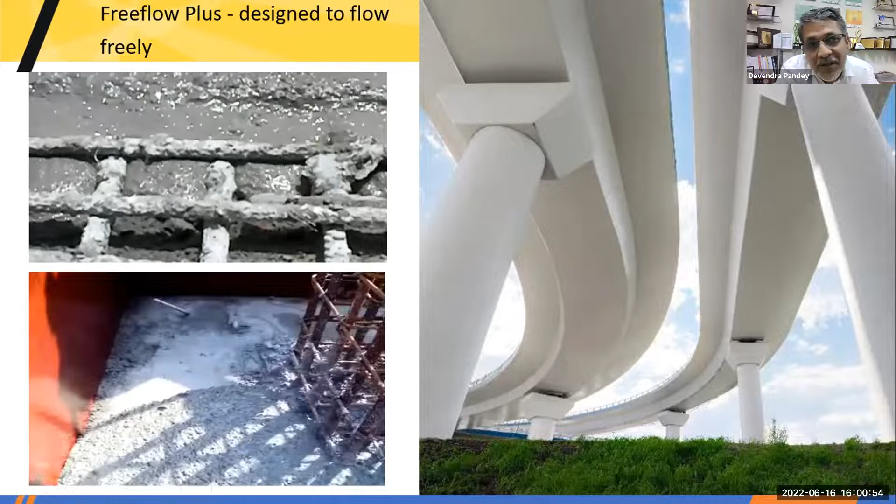It may be a small component, but it also causes noise pollution at sites, and all of this can be sorted by this variety of concrete, which does not require any manual compaction at all. Of course, there are other benefits, like you can have absolutely gorgeous finishes on the surface of concrete. You can imprint, emboss, you can have exposed structures, etc.

Another interesting variety of concrete is lightweight concrete, and it's basically a very good filler material. Sand is no more available in sufficient quantities. Spreading sand as a filler, even under tile bedding etc. in the construction site, causes a lot of dust, pollution, etc.

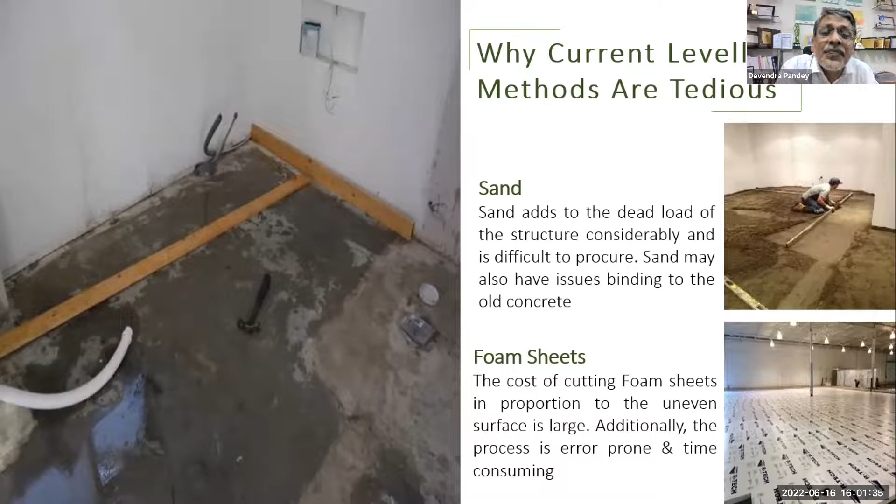A better alternative to that is lightweight concrete, which apart from being smart and very easy to use, also has a tremendous benefit of thermal insulation. So it has a very high thermal insulation value. Using it in roofs, etc., can give us very energy efficient buildings.

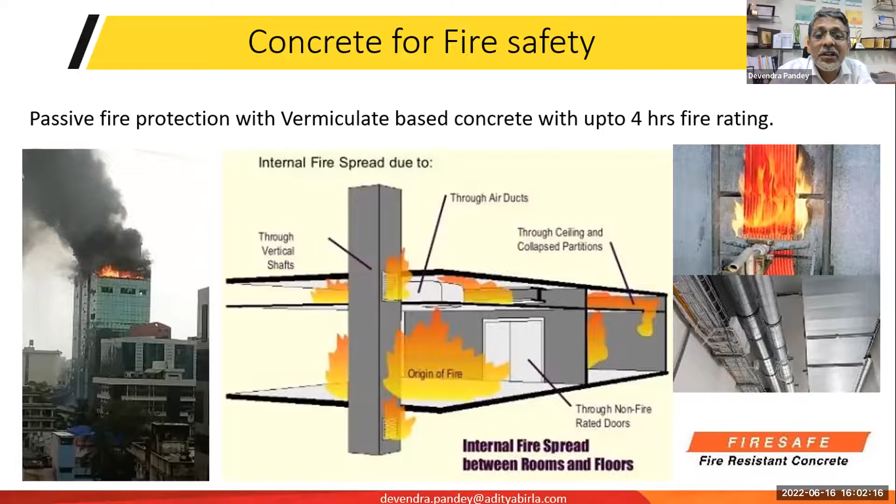Added to that, the same material also has a benefit of fire resistance. It can stop the spread of fire between different floors of the building. So it's also used as a fire stopping material. This is some of the usage.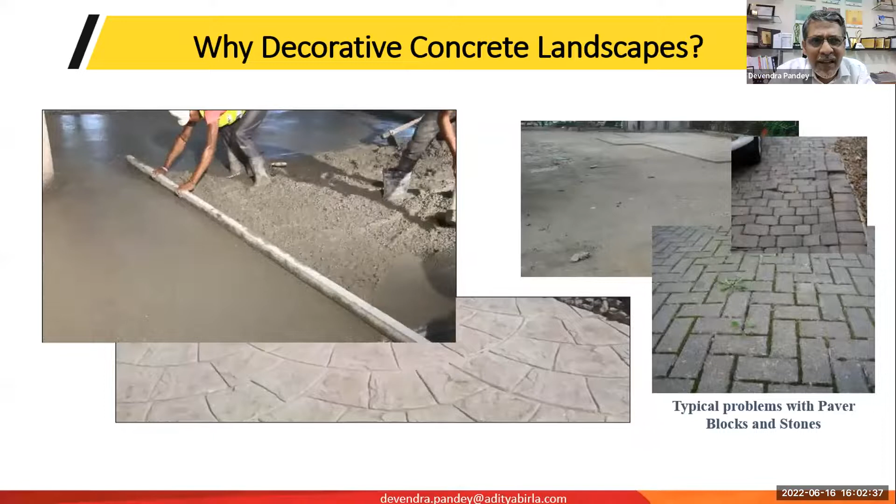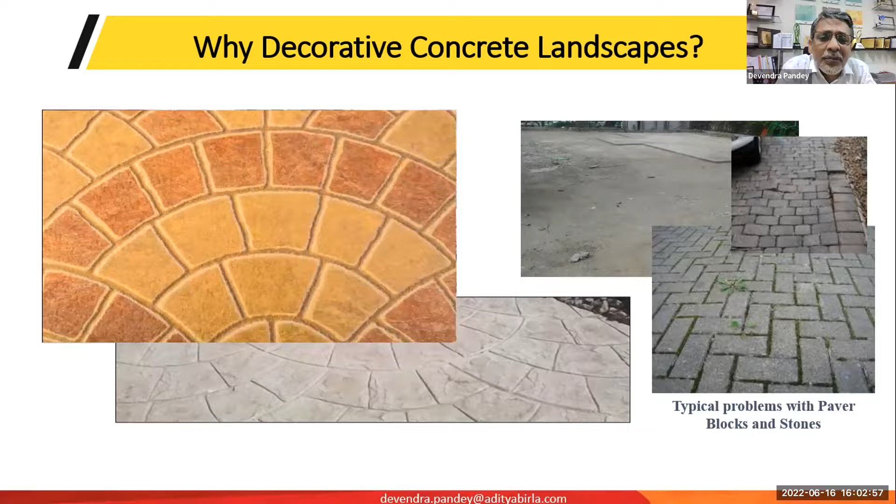Another variety of concrete is decorative landscaping material. The point is it increases the life of your landscapes. If we use materials like tiles and pavers in our landscape, every 5 to 7 years we need to revamp those, and that much material gets wasted, with cost and hassles involved. Here is a concrete alternative to landscaping which lasts as long as your building lasts, with a lot of beautiful varieties, colors, patterns, etc. So it can be a choice material for architects, but it is also a very green material in terms of

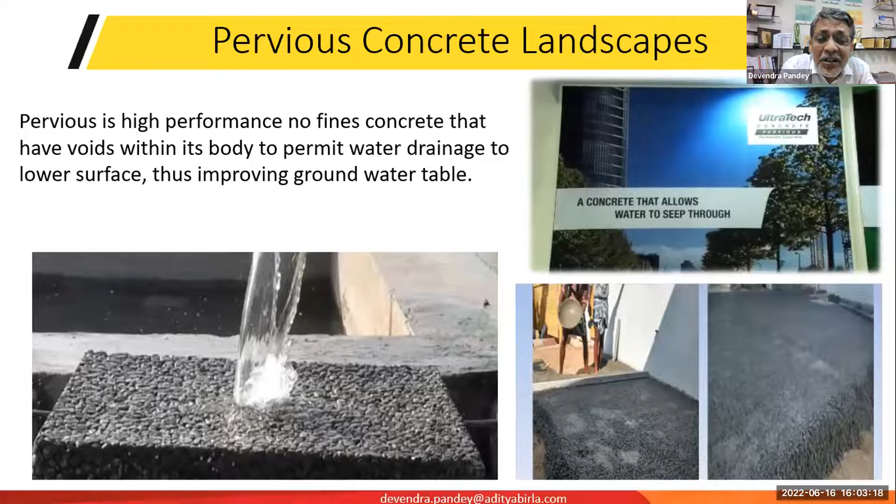the life. Another variety of concrete here is pervious concrete. Pervious concrete, as its name suggests, is porous concrete. It allows water to seep through it. So it's again a very good landscaping material because it conserves water. It recharges the groundwater. Hence it can be a very sustainable alternative.

Next is an upcoming material, very short, just a mention of it: glow in the dark concrete. It can be a very nice material for places like jogging tracks, walkways, again a landscaping material. As the name suggests, it will absorb sunlight during the day and emit light at night, and of course it will reduce the cost of lighting, etc. in the landscape.

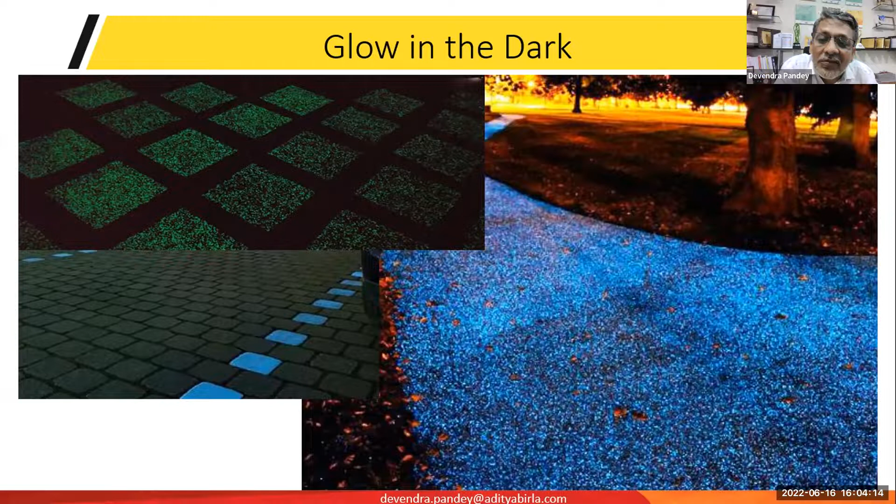One more emerging material is ultra high performance concrete. This concrete has a very high strength in the tune of 130 to 150 MPa, even higher, and it has a very high flexural strength. What is the benefit of this material? It allows thin section members, so facades etc. can be made of 1 inch thickness. A 4 meter tall facade can be just a 1 inch thick member.

Because of its own very high tensile strength, it does not require primary steel, so no requirement of cover. Because of no requirement of cover, you can still build 1 inch thick and don't worry. So it's a very promising material with amazing potential. On its own, it looks like a very highly cementitious material, but by virtue of reduction in overall material quantum, the overall footprint of your construction is going to be lower when you use a material like ultra high performance concrete. So

That's it for now. I hope it added value to this session. Thank you.

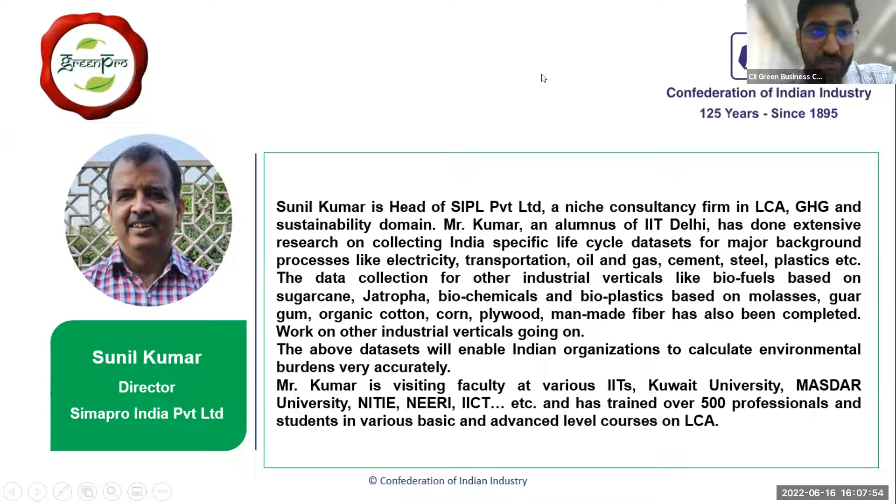Thank you, Pratik. And I am actually on tour, so my internet connectivity will be slightly in a compromising position, but I will try my best to complete the presentation in time. If you allow me, I will not share my photo so that bandwidth is saved. No problem in that, sir. Do you want me to share my screen with your presentation, or will you be able to do that? Yes, that will be better if you can do that. All right, I'll share it. Just give me a minute.

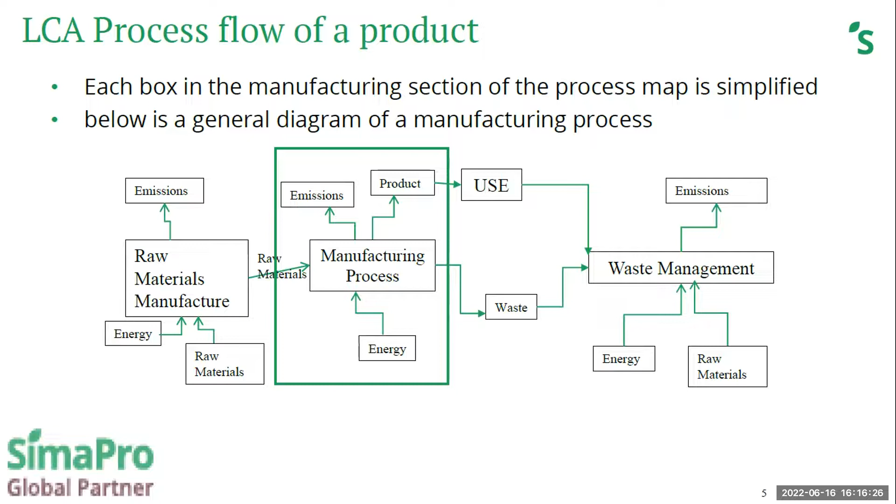But in some cases where clinker, slag, gypsum are getting outsourced, then you need to have a very good idea how these are produced and how these are getting transported. Transportation is again a very, very important factor in carbon footprint analysis.

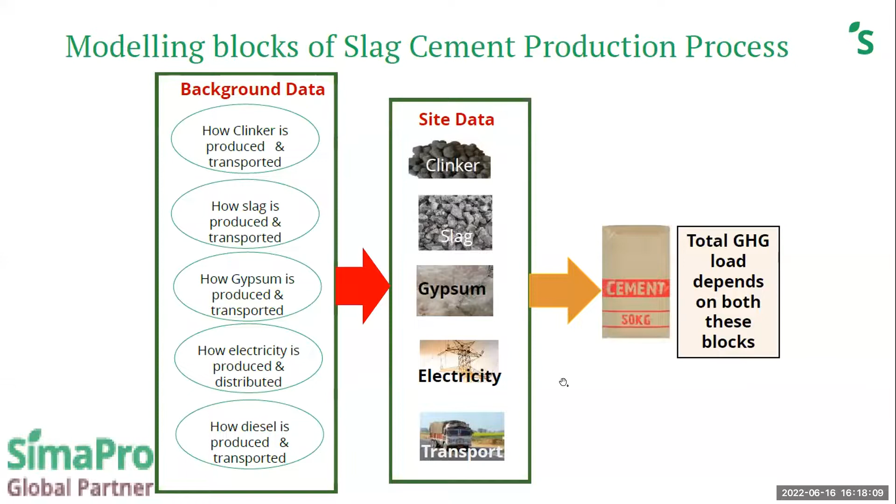Now, what are the things that influence the accuracy of life cycle assessment or GHG results? Have you created a process for cement production that has been modeled on site data, or have you created the process for electricity production for your site, or are you simply getting data from software? As Mr. Karthikeyan said, most LCA softwares have data from Europe and US. So are you using data available in the software for the electricity process? Or similarly for diesel and gas production, are you using US and European data? Or have you clearly produced or modeled a clinker or slag or gypsum production process?

If the answer to any of these is no, then you have compromised your accuracy. And if you are using European and US processes available in the software used to model LCA, then again you are compromising your accuracy part.

So accuracy and robustness of GHG-LCA study can be compromised, or in other words, greenwashing has been done. How? We have done some analysis to show this.

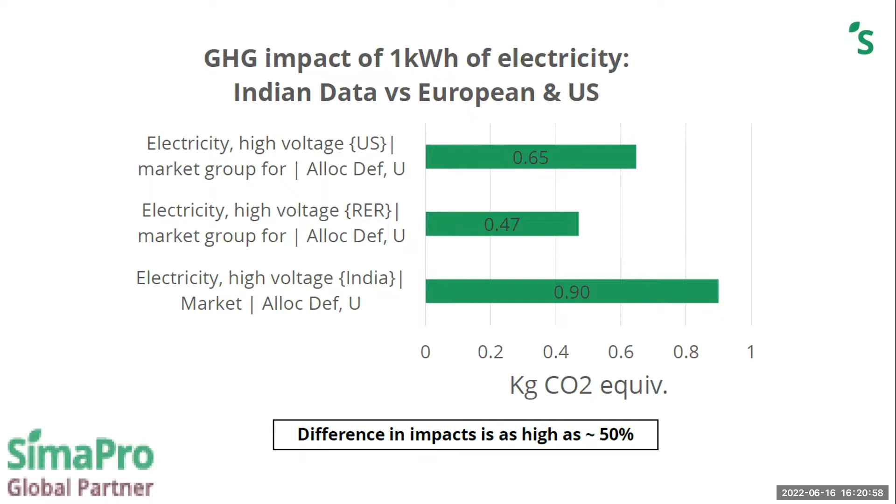So if instead of Indian data you are using data from US and Europe, then you are certainly compromising the accuracy part. If you are not able to accurately calculate the carbon, then the whole process of pursuing low carbon would go to waste.

Considering electricity and transportation, you have seen how much accuracy you have compromised. So if you are calculating your low carbon based on European data, then I'm sorry to say you are not doing justice to your low carbon efforts. You must do this based on your site specific data.

Now you may ask the question, why does this happen actually? The electricity production mix is different. What does it mean? In India, as per CEA data, around 65% of electricity comes from thermal power, basically coal-based power plants and natural gas power plants. In the western part of India, this goes up to 70-75%. In southern India, it goes up to 70%.

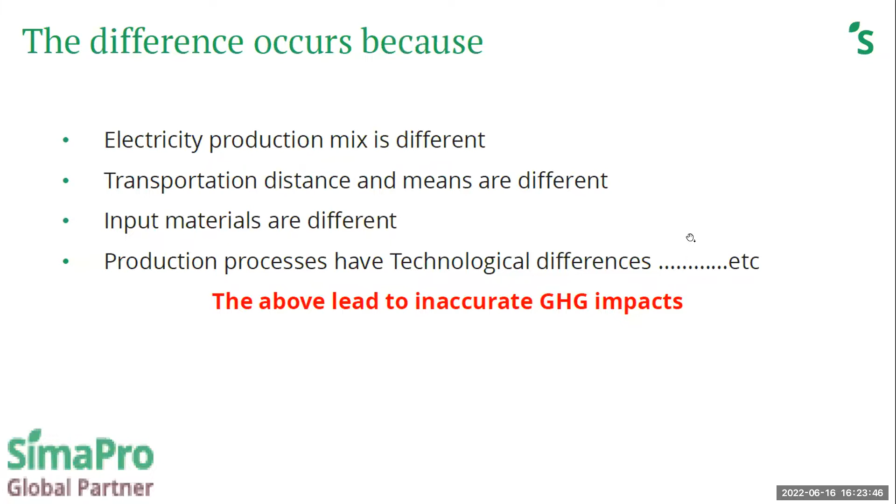This is how you get graphs for your LCA results. This result is for 1 kg of OPC, ordinary Portland cement, and green shows clinker production. As you can see in almost all categories, including carbon footprinting, clinker constitutes the lion's share of total environmental impacts. In case of global warming, the third from left, about 75% of environmental load is coming from clinkerization.

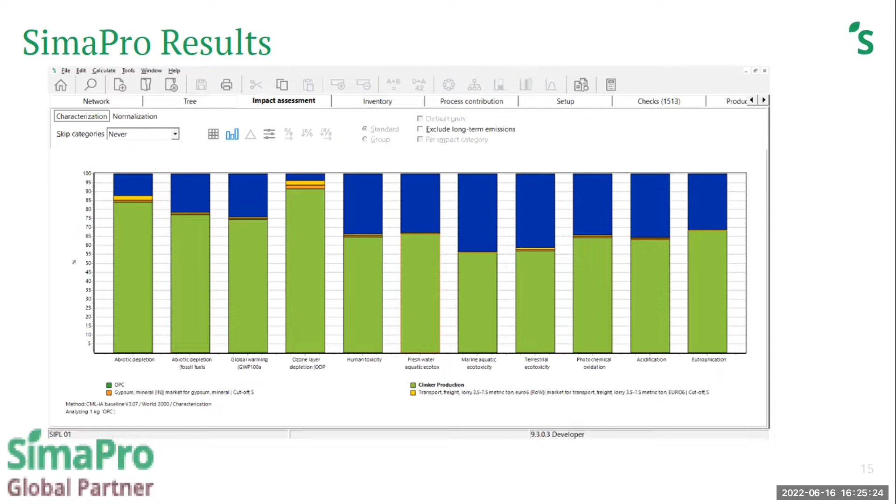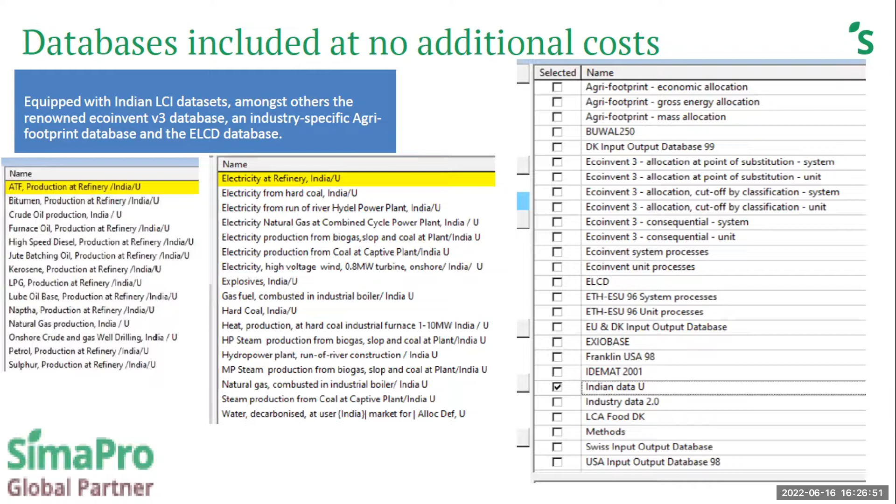These are the data sets we have collected from various reputed companies in India. We have transportation details from ARAI Pune, then production of diesel, petrol etc. from 3 refineries in India, IOCL refineries. For electricity from coal, we collected coal production data from Coal India Limited and NTPC for production of electricity. Similarly, many other parts we have covered for the Indian data set so that we have very accurate calculation.

You also get sector-specific data sets. Here we've given an example for cement, but you can get sector-specific data sets for almost all industrial verticals available under the sun.

SIPL Private Limited or SimaPro - these are companies where we provide our services or software: ABB, OCL, BPCL, John Deere, universities, almost all the IITs - IIT Mumbai, Chennai, Delhi, Roorkee, Kharagpur - everyone uses SimaPro for research purposes. Research institutions like CSIR and ICAR institutions, CRRI, CBRI - Central Building Research Institute - they all use SimaPro. Individual sustainability partners and small and medium organizations also use SimaPro.

So how will we support sustainability? We can do life cycle assessment. You can do hotspot analysis to find out the gray areas in terms of carbon analysis. Then you can find suitable materials, compare two materials to see which one is better, find more suitable materials in terms of plastics, rubber, paints. Similarly, you can emphasize site-specific data to calculate the most accurate environmental results, and comparative assessment will support you in establishing yourself as a sustainable manufacturer.